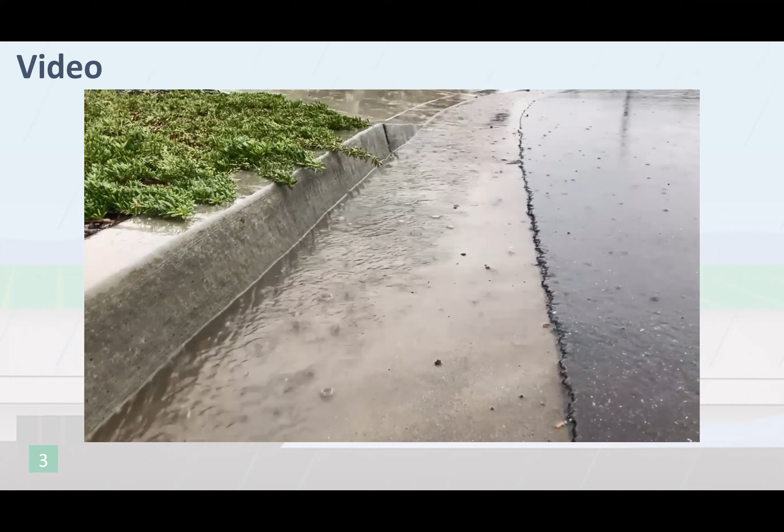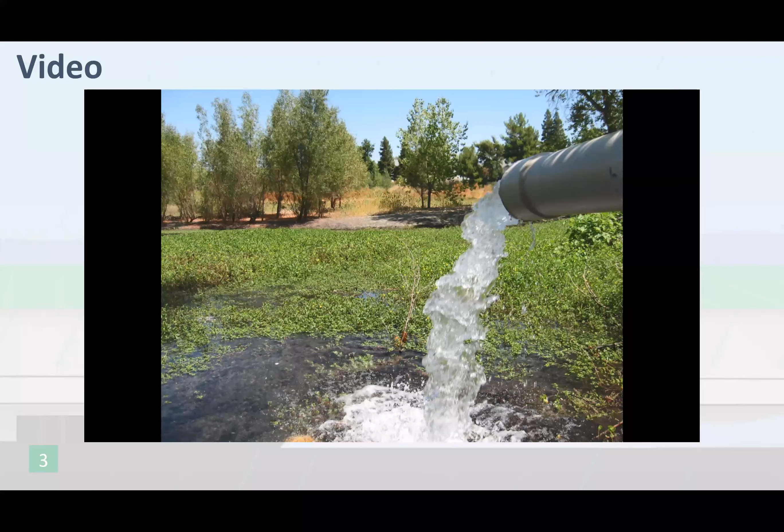The City of Davis Stormwater Fee Initiative. First of all, what is stormwater? Stormwater is water from precipitation that flows across the ground and pavement when it rains. An important system of drainage inlets, underground pipes, pump stations, and channels convey that stormwater out of the city and into surrounding wetlands and waterways. There are 130 miles of pipes, 19 pump stations, and over 4,000 underground structures that make up the city's stormwater system. This infrastructure is critical to ensure that Davis does not flood when we get a lot of rain.

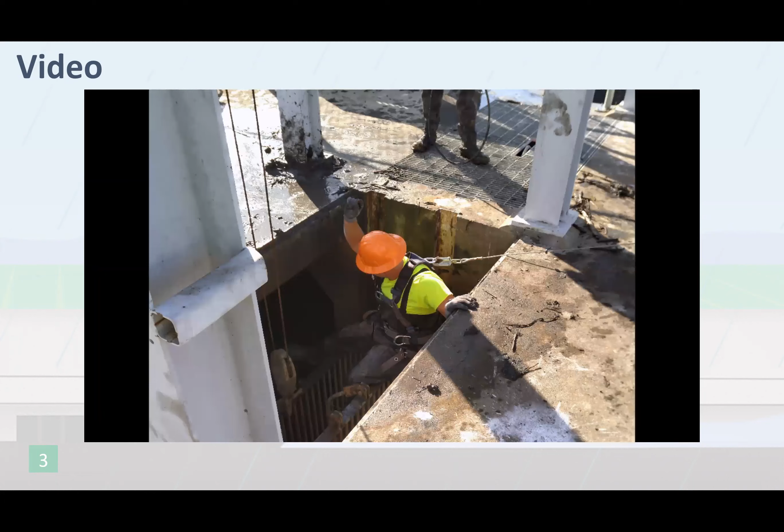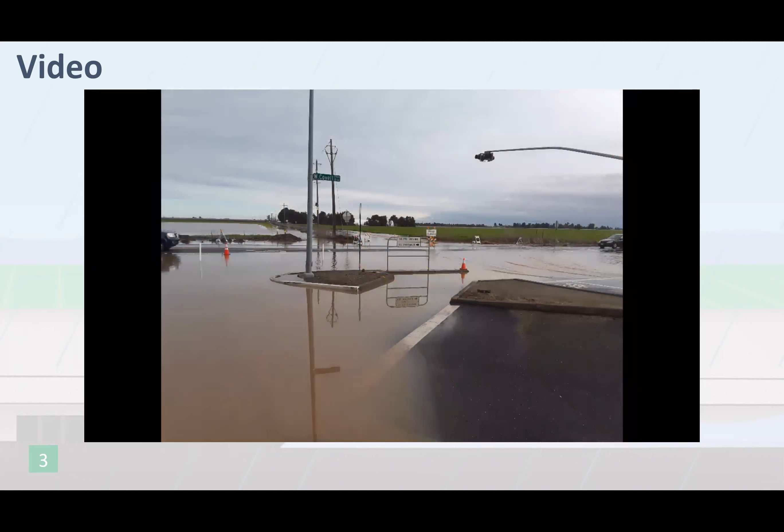Flooding is caused when leaves and other debris clog the storm drains and pipes, or when water collects in low-lying areas of the city. City crews also clean out stations like this one before every rain event to help prevent flooding. A well-maintained stormwater system effectively moves water from roads and neighborhoods to reduce the possibility of flooding during significant rain events. Another critical component of the city's stormwater program is water quality protection.

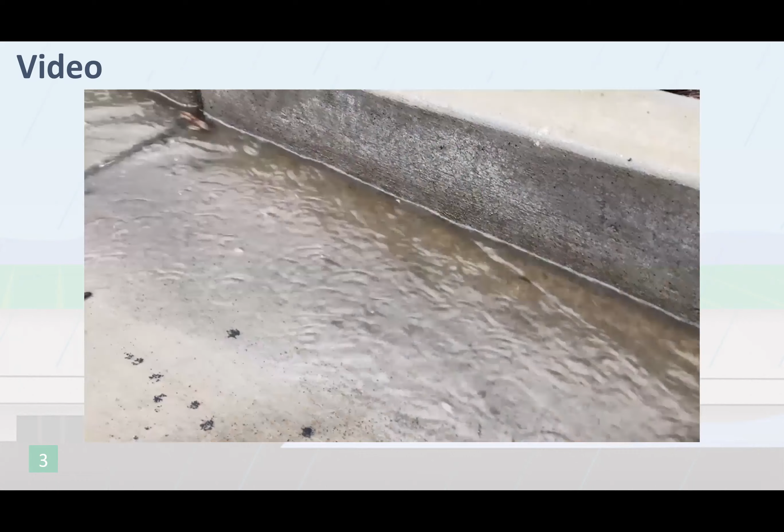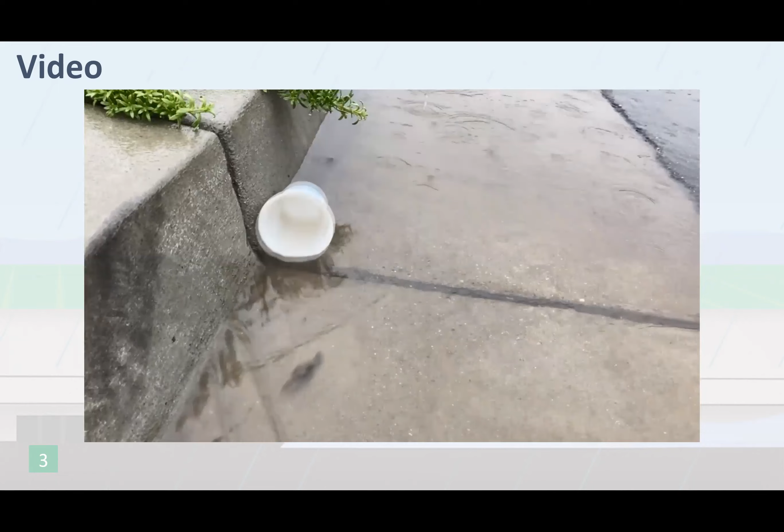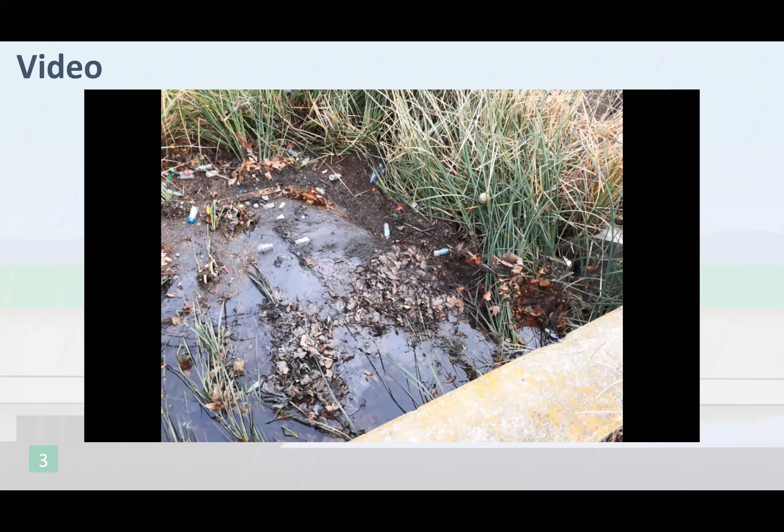Stormwater starts as just rainwater, but as it runs off roofs, yards, driveways, and streets, it can pick up pollutants such as dirt, trash like cigarette butts, pesticides, and other materials in its path. These pollutants can harm fish and other wildlife. Currently, the city's detention ponds can help treat stormwater by allowing contaminants to settle out of the water before it reaches local waterways. Recent legislation has mandated that cities in California work to capture trash before stormwater leaves detention ponds. This is a costly undertaking as new infrastructure is necessary to be in compliance with these state regulations.

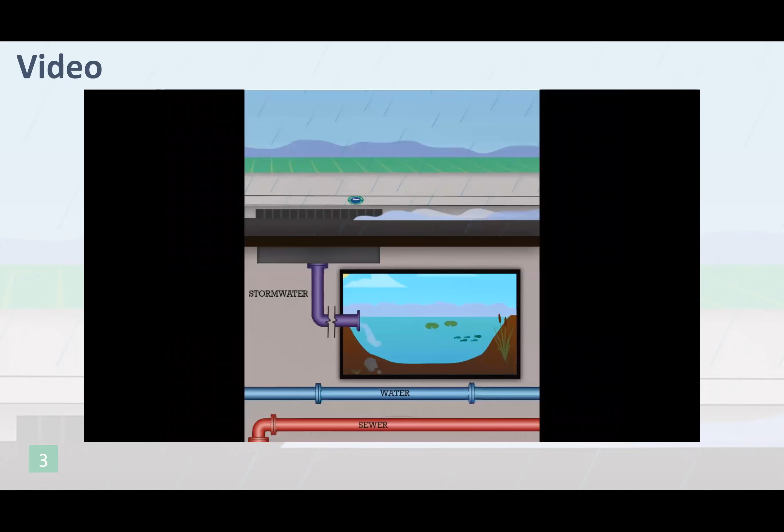Did you know that stormwater does not go to the wastewater treatment plant? It is not treated and flows directly to local wetlands and waterways. In recent years, storm drainage systems have become a front line in environmental protection. Keeping pollutants out of stormwater is critical to ensure clean waterways.

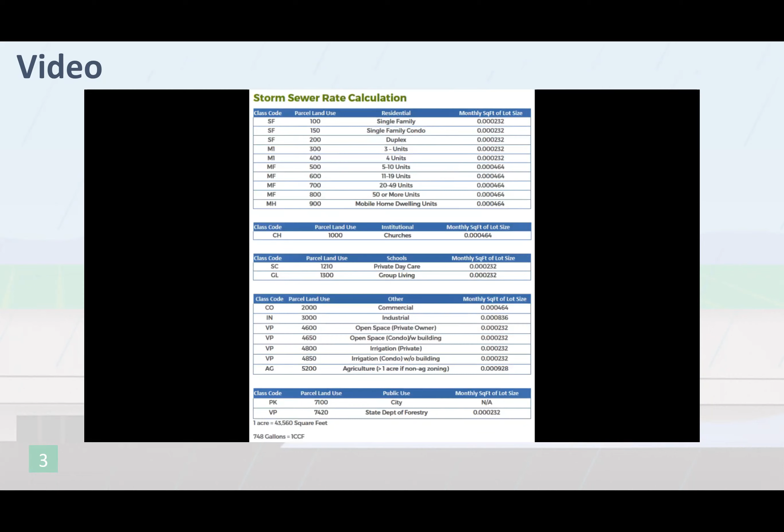All property owners in Davis currently pay a storm sewer fee and a drainage fee as part of their monthly utility bill. For a single-family customer, these combined fees total about $6 per month on average. These charges vary by property type and are currently assessed as a flat rate charged per square foot of the parcel. These two fees are shown as one amount on your monthly utility bill. The current stormwater fees have been in place for decades, and while one has an escalator to help the fee keep up with inflation, the other does not.

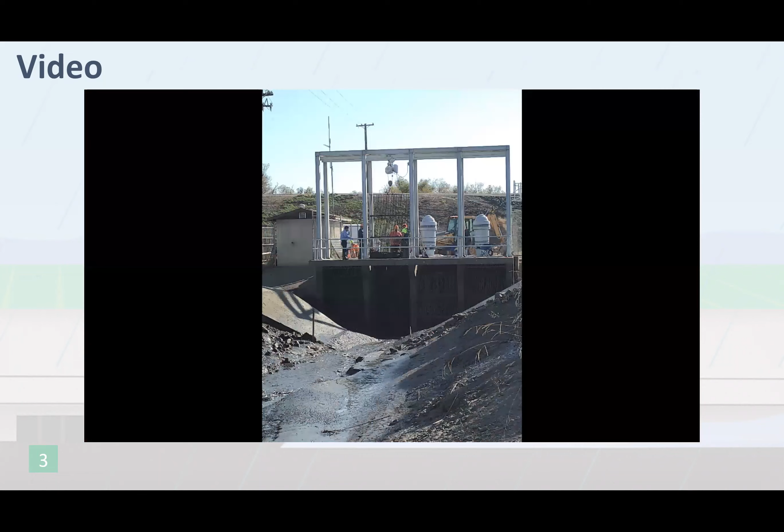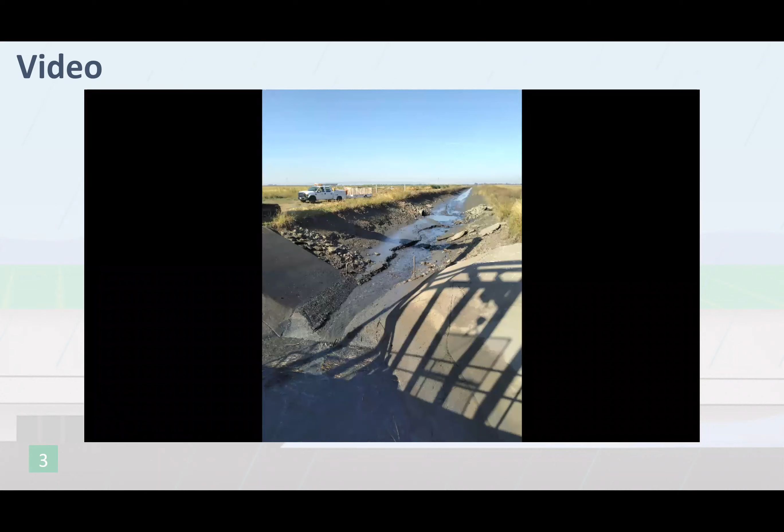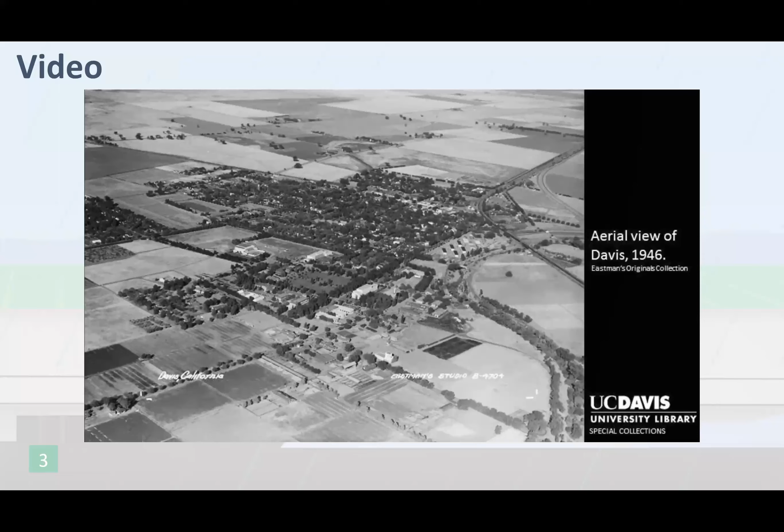These fees cover most but not all of the current operations and maintenance costs for the stormwater system, but have not kept up with rising costs or regulations, and do not cover the costs to replace aging infrastructure or other necessary capital improvements. The city's stormwater system was built to manage the stormwater needs of a smaller city footprint, and has not been able to keep pace with changing community needs or storm patterns, leading to localized flooding within the city during major rain events. Modifications to agricultural practice surrounding Davis have also contributed to more frequent flooding events in outlying areas.

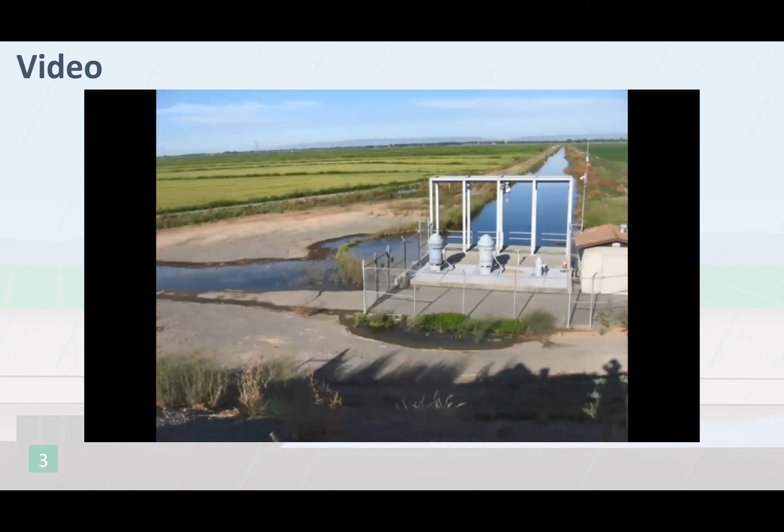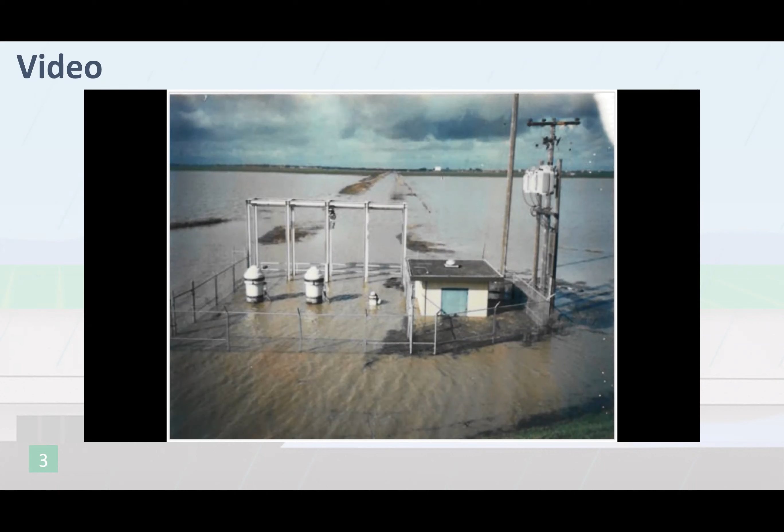The city also has some aging infrastructure that needs to be replaced before it fails. This South Davis pump station was built in 1965, and the station itself is subject to major flooding. Here is what the South Davis pump station looks like during flood events. Due to higher levels of flooding caused by increased water runoff over the years, city crews have had to install a steel plate about halfway up the door to this station in order to keep the floodwater from entering and destroying the equipment inside, and even that is barely enough to keep the water out.

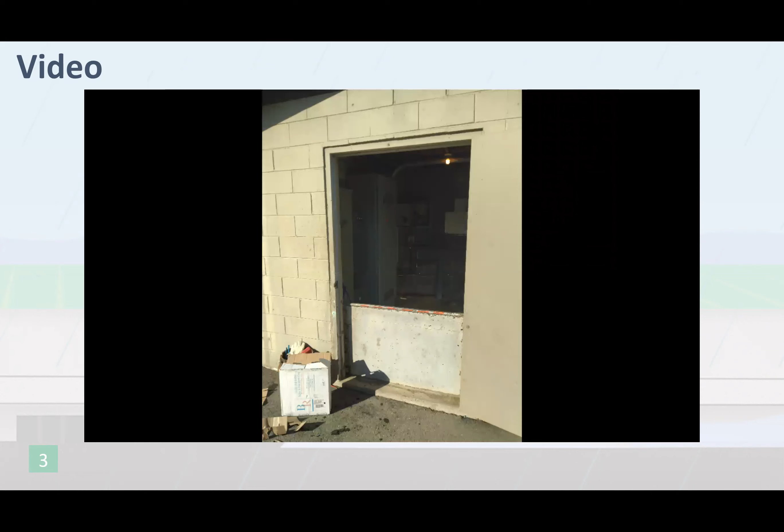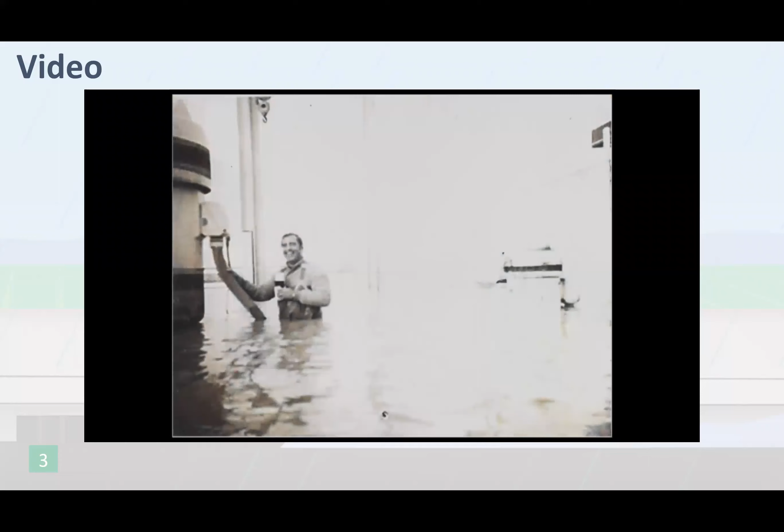This station did flood prior to welding this plate in the doorway, and the station did fail. Since the plate has been in place, the station has not flooded. However, as can be seen in the photo, it has been close at times. This flooding also causes safety concerns for staff when they need to wade into the floodwater to access the station.

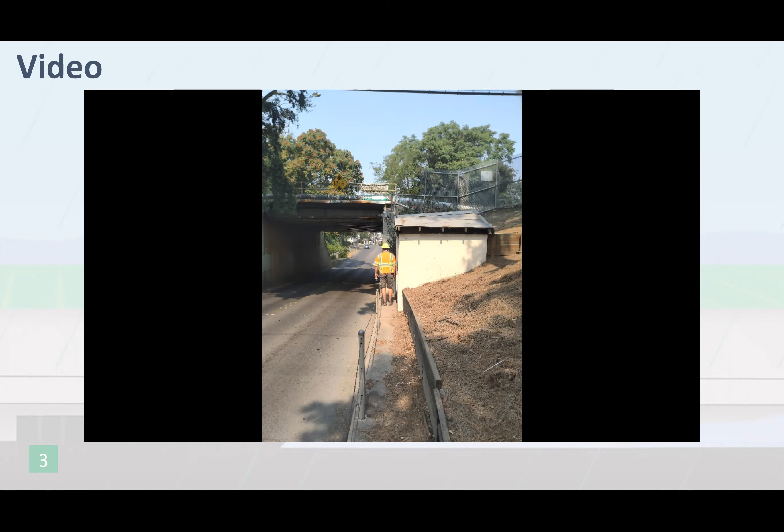Even when not flooded, they have to step over this 2-foot-tall plate year-round. Some of the equipment in pump station number 6, as shown here, has been in use since it was built in 1924 and is well past its recommended replacement date.

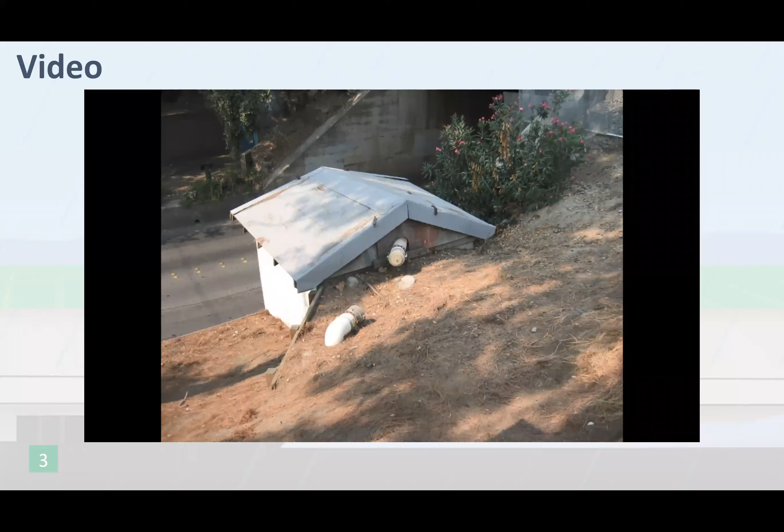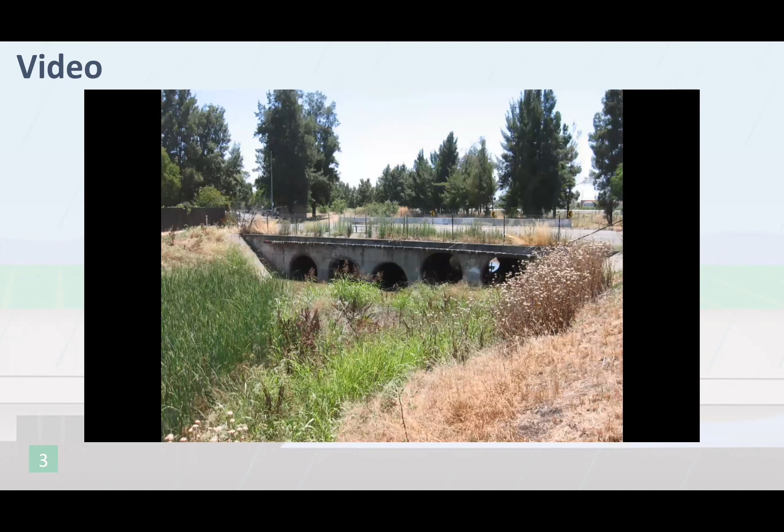The equipment in both of the pump stations shown is long overdue for replacement with new, more energy efficient and higher capacity equipment, but the current stormwater fees cannot cover these costs. State regulations related to stormwater management and quality have also recently been updated. These proposed rates will allow the city to adapt with these changes without competing for funding with other vital city services.

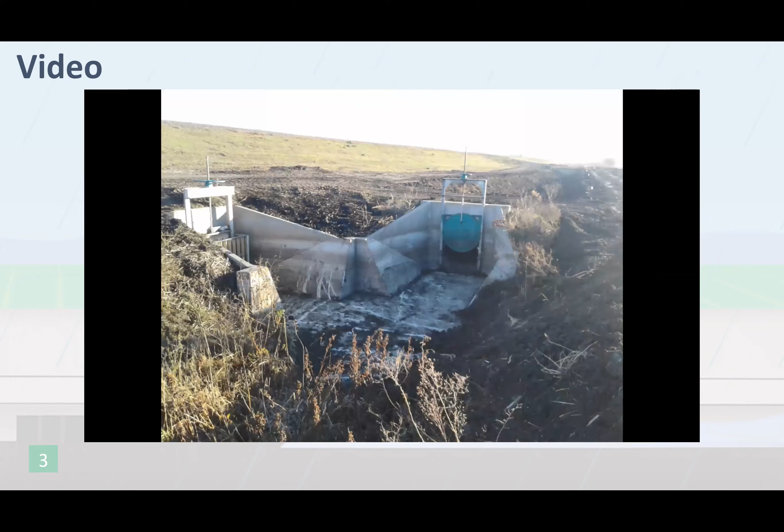As maintenance costs and clean water regulations continue to increase, without a new stormwater fee, the program will struggle to meet its commitment to city residents, businesses, and visitors to keep up with its important flood control and clean water responsibilities. A dedicated and reliable funding source, which would replace both of the current stormwater fees, is needed to provide for clean stormwater, flood control, improved maintenance, capital improvements, and enhanced services.

The proposed stormwater rate will be approximately a $7 increase per month for single-family property owners. In order to address these funding issues, city staff initiated a fee study in coordination with the city's Utilities Commission, culminating in a fee report which lays out all of the stormwater facilities and services, projected the program's revenue requirements, calculated how much each type of property contributes to stormwater runoff, and determined how much each type of property should pay as its fair share of stormwater costs.

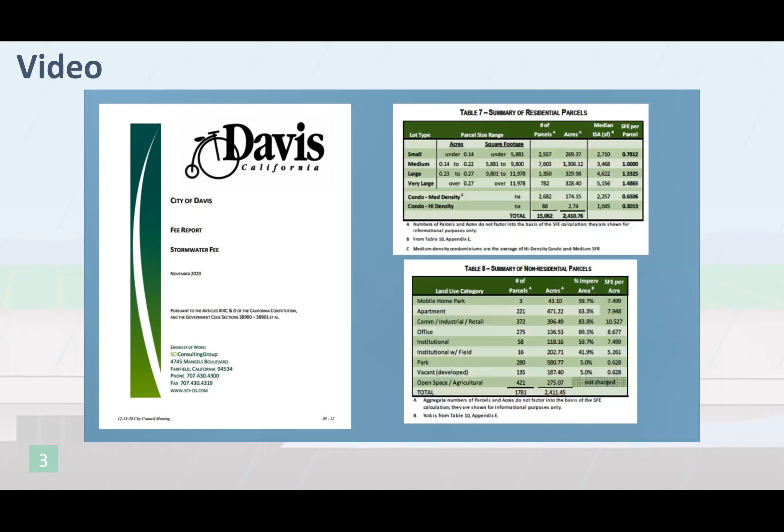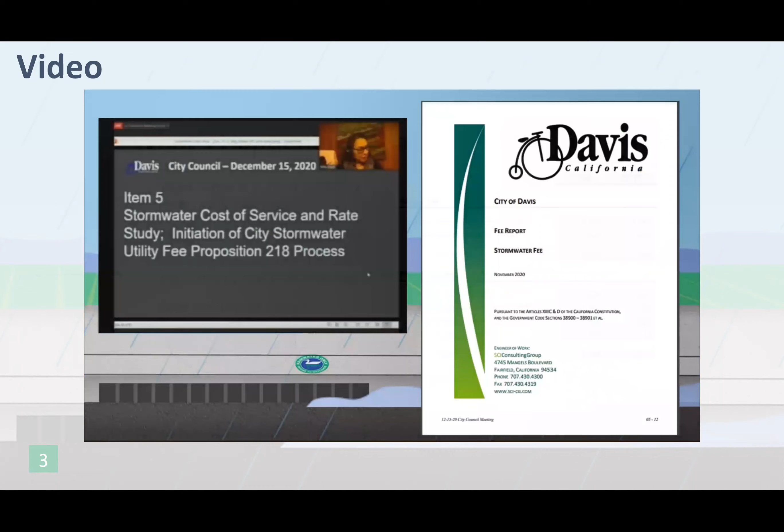The fee report and proposed fee increases have been reviewed by the city's Utilities Commission and reviewed and approved by the City Council. The fee report shows the current revenues and expenses of the stormwater program. As you can see, projected expenses for this year are currently higher than revenues.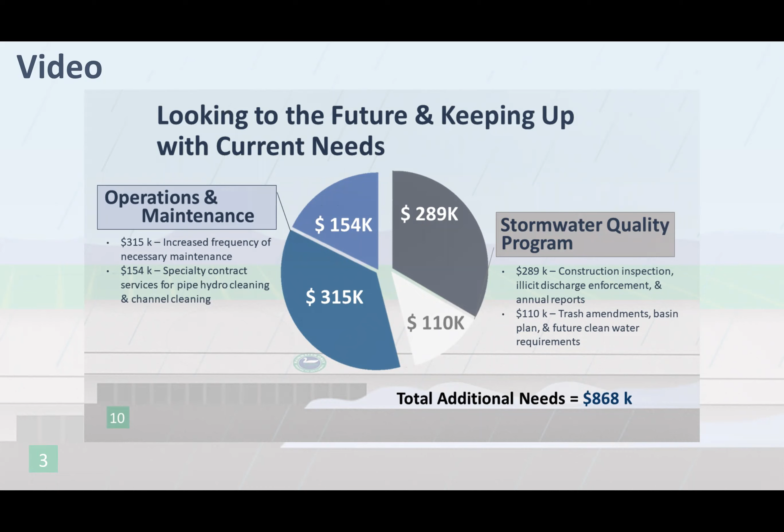The fee report estimated some future needs to add to our baseline values for operations and maintenance. These needs include an increase in the clean water standards the city must meet before it discharges stormwater into the creeks, as well as other operations and maintenance costs. The fee report also quantified the stormwater system's high-priority capital needs, including replacing outdated pump equipment as we discussed earlier, and widening the Covell Channel to meet increased water flow needs.

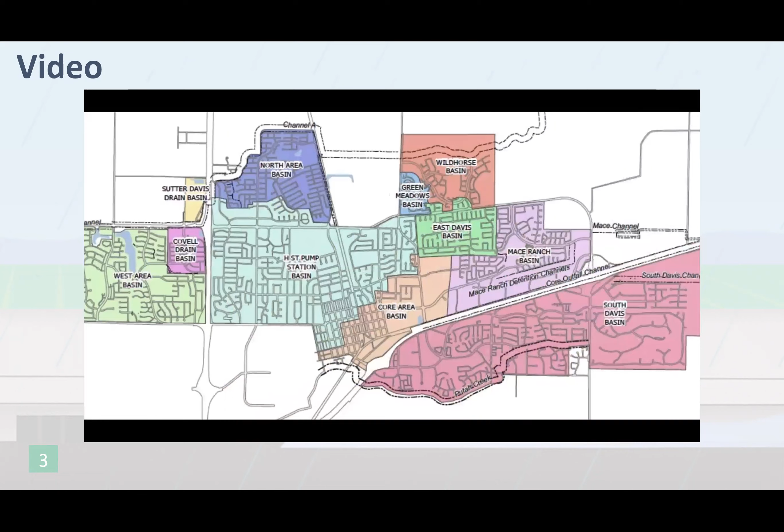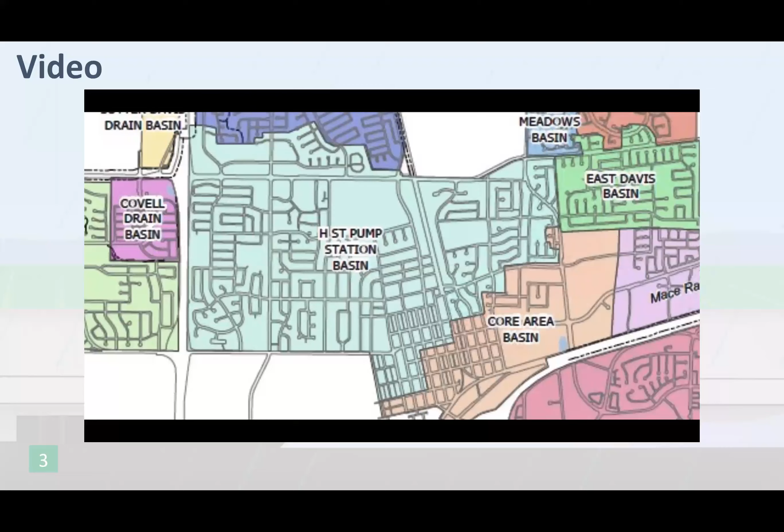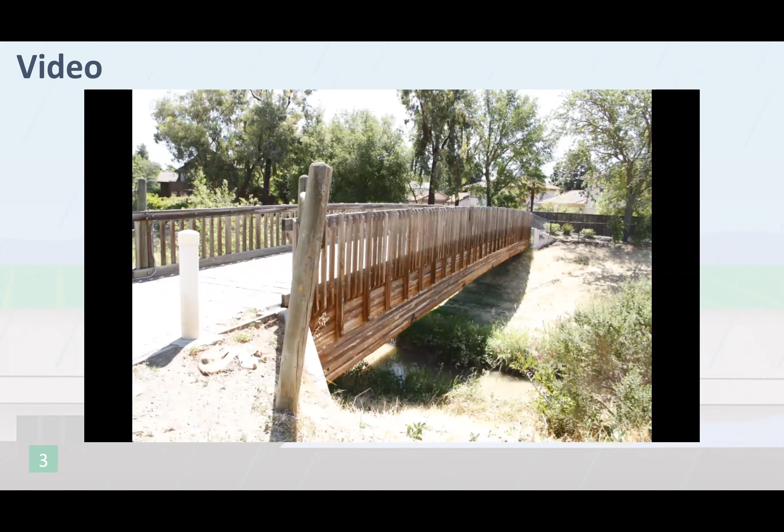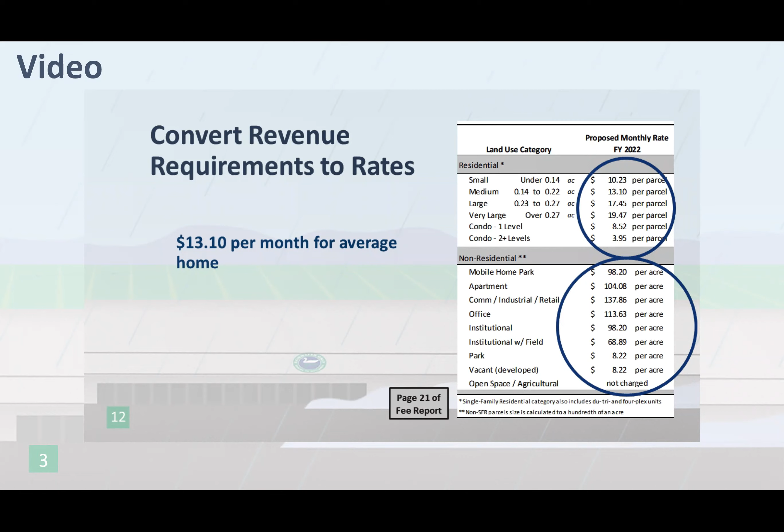Page 21 of the fee report shows the amount of the fees being proposed to cover these costs. The average single-family home would pay about $13 per month on their monthly city services bill for stormwater, with smaller residential properties paying a little bit less and larger residential properties paying a little more. Other types of property would also pay their fair share, as shown here.

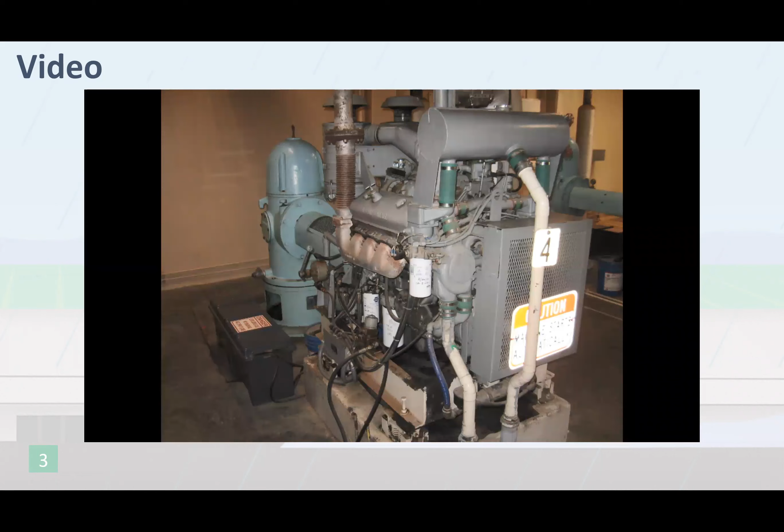As with all of our utility funds, there is a robust public process to review how these funds are spent. Each of the city's utilities is a dedicated enterprise fund, meaning the rates pay for the program and program operations entirely and cannot be utilized for other programs. Each year, the city's Utilities Commission reviews each fund, including rate revenue and planned expenditures.

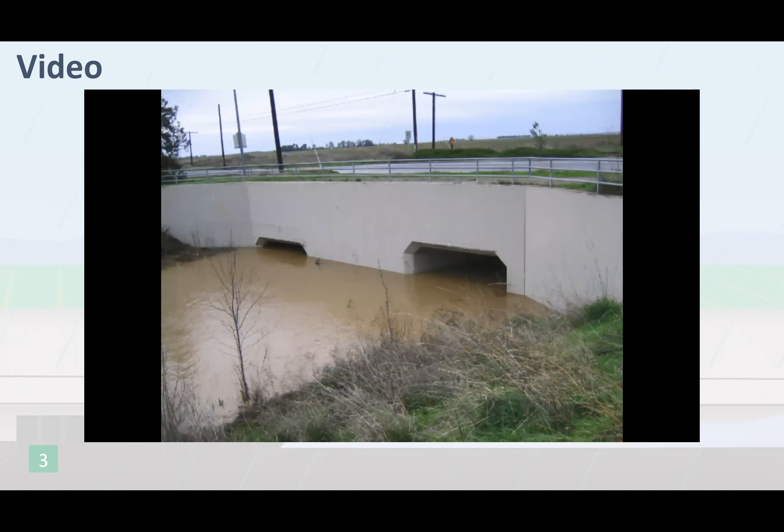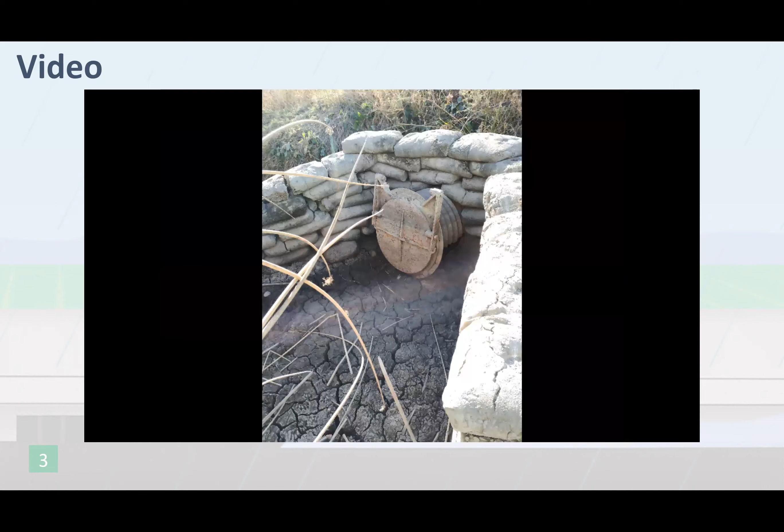Stormwater fee updates will be presented annually to the City Council with the Utilities Commission recommendations for the city budget process. In the past, the city's general fund or loans from other utilities could cover minor required maintenance activities not currently paid for by stormwater fees. But in recent years, the needs of the utility have expanded beyond these minor projects.

Property owners will determine whether the proposed fee will be implemented. There are 3 different opportunities to make your voice heard regarding the proposed stormwater fee increase. A notice was sent out to property owners mid-March with information on the new proposed fee. The notice also provided details on how property owners who do not approve of the proposed fee can submit a written protest. There are 4 virtual community meetings being held via Zoom in March and April.

All right, so before we get started on the live Q&A, we have a couple of questions that have already been asked a few times that we wanted to go over, and they are listed here. We have questions about how the stormwater fee is currently charged, if we could use some of the federal stimulus money for stormwater infrastructure, how we define enhanced services in the notice, and why we're using a CPI from the Bay Area. So each of the following slides is going to have a short response to these questions for you all today.

The stormwater charge appears as one charge on the monthly utility bill, as we stated in the video, and it is a combination of two charges. And that is a little confusing, but we do have two charges that create the one charge that appears on the bill.

In terms of the use of the federal stimulus dollars, we are still looking into the requirements around the use of this money, but right now all signs are pointing to that funding being intended for COVID relief and COVID relief measures, not for infrastructure improvements that would not be tied specifically to the COVID-19 pandemic. We do want to say the city is always looking for opportunities to apply for grants to offset any major projects that we might have.

And the rates that we have account for a number of necessary adjustments to the Stormwater Enterprise Fund, including the development of a reserve and funding for routine services that aren't necessarily appropriate for a one-time fund source like these federal stimulus dollars.

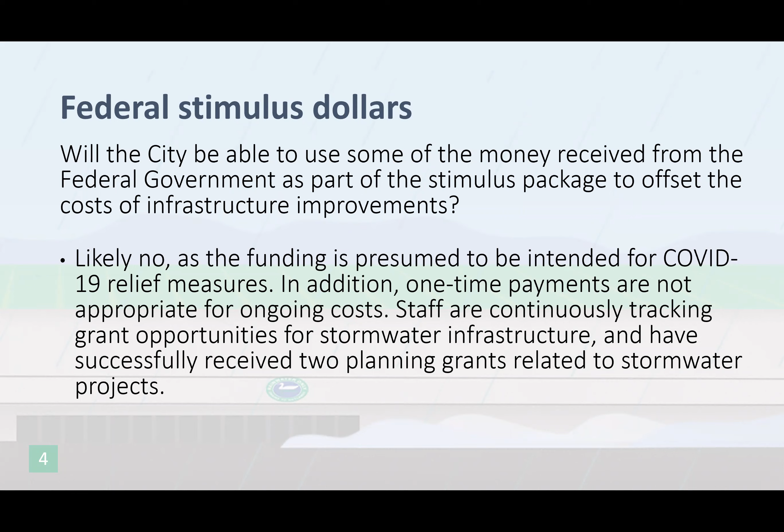In the notice that was sent out, we included a reference on enhanced services. We wanted to clarify that the term enhanced here is being used to describe services that are not currently being performed or are not performed as frequently as needed, but are necessary to maintain efficient and effective operation of the utility and to prevent backlogs like the one that we are currently experiencing.

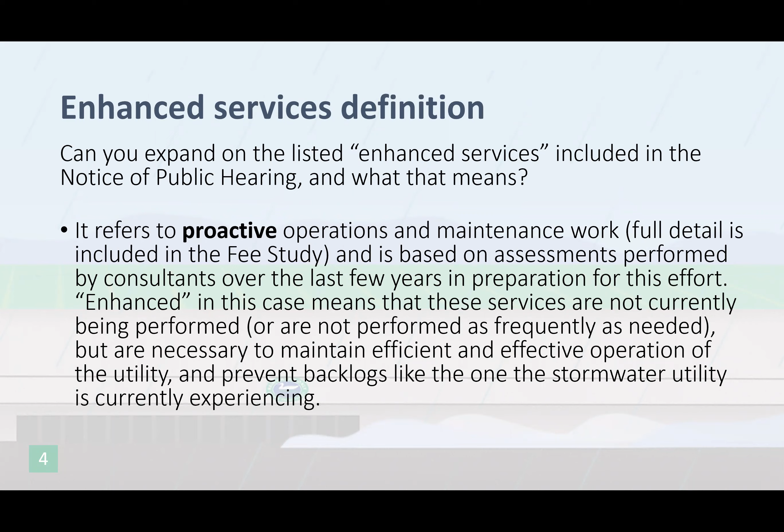And lastly, the city used the San Francisco Oakland Hayward Consumer Price Urban Index as it is used for taxes, assessments, and fees by agencies throughout Northern California. The cost components of the stormwater program are impacted by a wide variety of factors, so no one CPI will be a perfect match.

But what we'd like to say is it's important to remember that the rate will not adjust automatically. The CPI index sets the max amount up to 3%, but the City Council, with support from the Utilities Commission, will set the actual rate each year based on the program revenue and expenditures. So there is always a check-in process for the rate setting. And as we start the questions and answers with staff, we want to make sure that we can address as many questions as possible.

Because of that, we're going to ask you to help us out by asking one question at a time. If you have additional questions, please wait and raise your hand for the next opportunity. If we're not able to get everyone today, we will post the questions on the city's website under the information for this public meeting. And you can always email questions to pwweb@cityofdavis.org, and someone will respond to you.

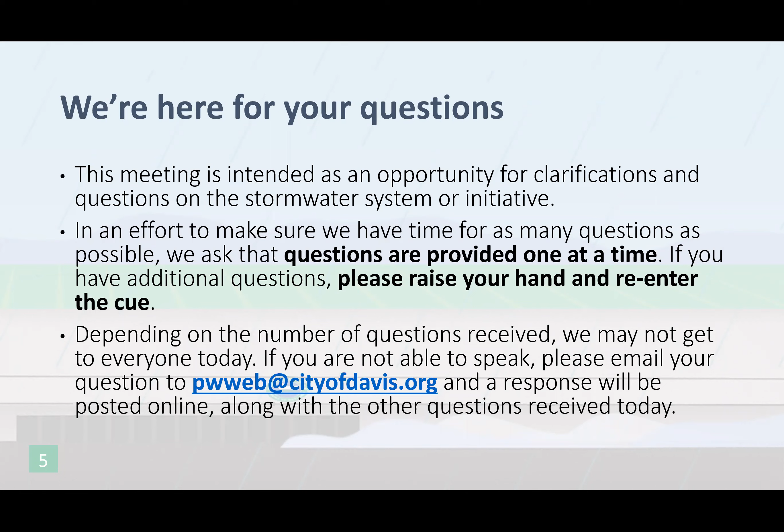Thanks so much. All right, thank you, Adrian. At this time, we'll open the floor to any questions that anyone might have. The directions to be able to do that are on the screen now. Basically, press *9 if you're on your phone, or go ahead and raise your hand in the Zoom. If you don't know how to raise the hand, if you go down to the bottom of your screen, there should be a raise hand function that pops up, and if you click on that, we'll be able to let you in.

Okay, I see one hand raised. Okay, Michael, you are unmuted. Feel free to ask your question. Still showing as muted. Michael, you've been given permission to talk, but you may need to unmute yourself on Zoom.

There you go. Okay, so my question is about your capital projects. You know, you had a general description of those. What are specifically the capital projects? Over what period of time would the projects be executed? And that's basically my question.